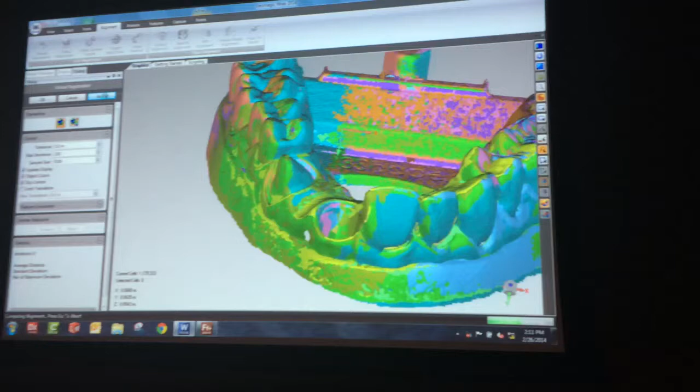What it does is see how it's moving. So now all 10 scan data is tight, perfectly fit with each other. Any questions so far?

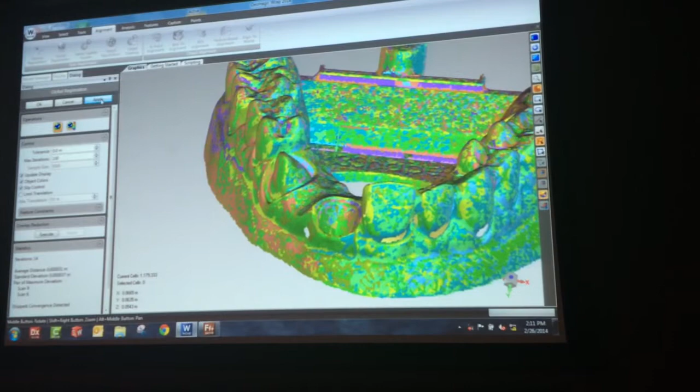Okay, so now scanning. Are you guys familiar with what scanning is? A little bit, technologies. So it always comes in points. Yeah, so this is still in points. What the next step is, convert into a mesh or STL. So I'm going to do that.

So far, pretty straightforward, the software. You don't see me putting numbers in, everything just click OK, click OK. So there's no numbers much involved with this.

So what it's doing is just connecting the dots. Basically the scan will have 1.1 million dots. That's basically what we just connect, all the dots, all the points together, and turn into a bunch of triangles.

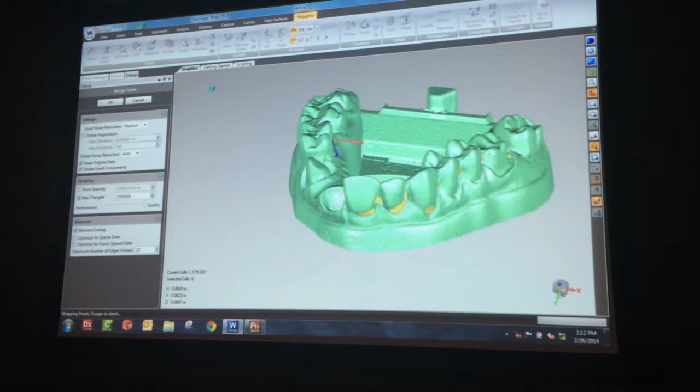So now I'll just kind of show you what it looks like. See, it consists of a bunch of triangles. It came along pretty good details too. If you guys can see that part, it's that 3D shape right there. So just a little simple editing and wrapping, it comes out.

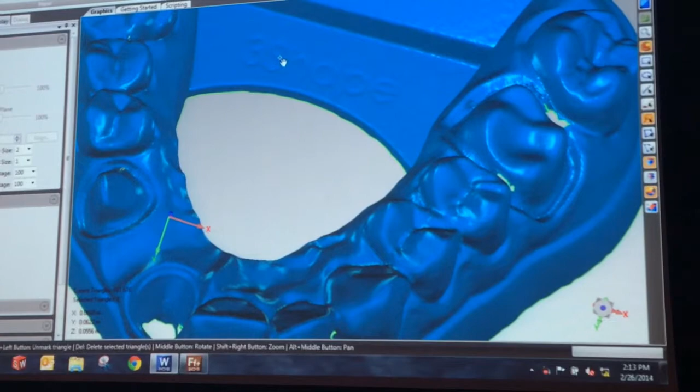Okay, so next step, couple of things. This is, when you scan something, it's in, technical-wise, in the middle of nowhere. Because the origin is in the middle of nowhere. Basically what we need to do is find out the center plane, so I can take the left side of the teeth and mirror it to the right side. So use it as some type of example instead of starting from scratch to draw teeth.

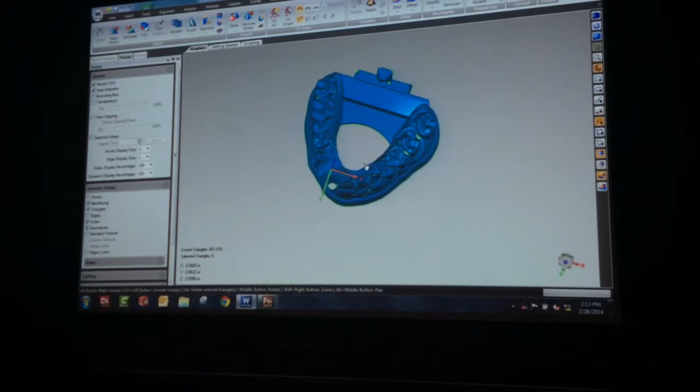Yeah, so first thing first, I want to get it aligned. Let me check on mesh. Just kind of clean it up. Take a seat, am I blocking you guys? Oh okay, just kind of clean up the scan data.

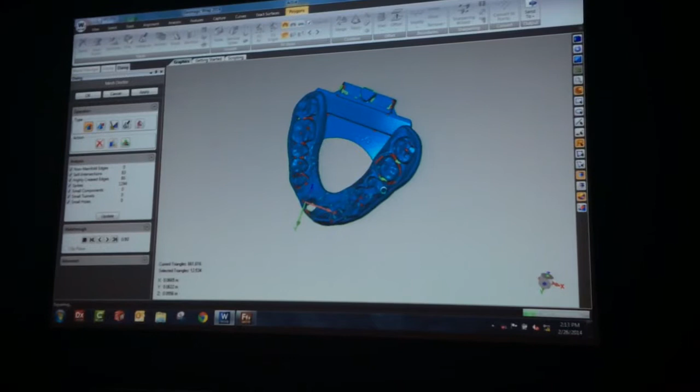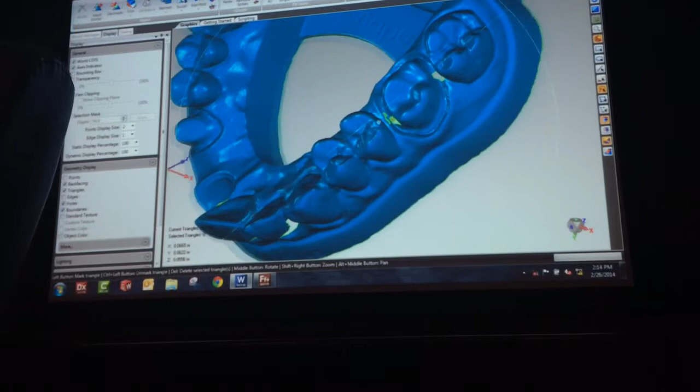So it's kind of what we call Mesh Doctor, just clean up the scan data. This should be all zero. Let me show you the hole fill process. So some of this area that we couldn't get to, we can simply fill all these holes. Just simply click on these. Instead of manually doing it, you can also do fill all.

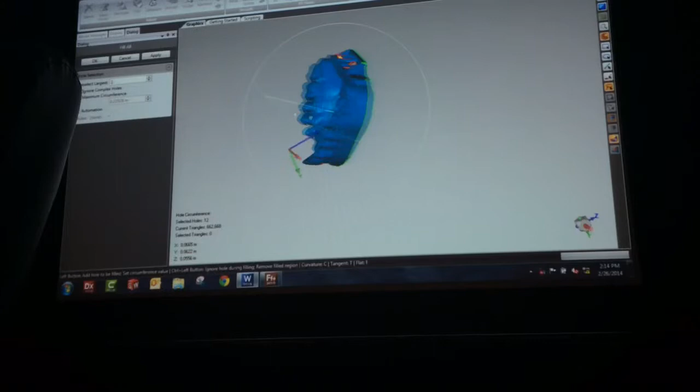So I can ignore a couple of big ones that I don't need to. And I simply hit apply, so these holes will be filled. And then I want to fill them at the bottom here too.

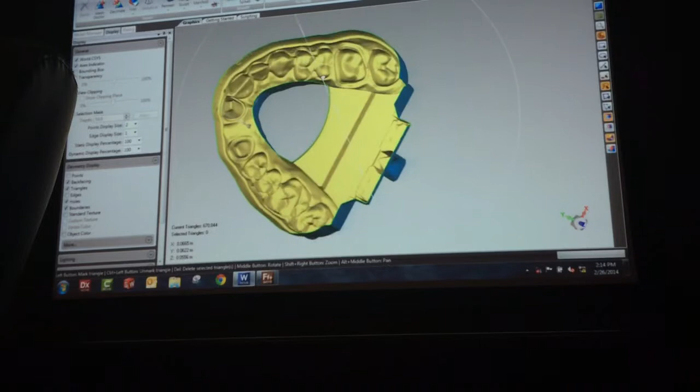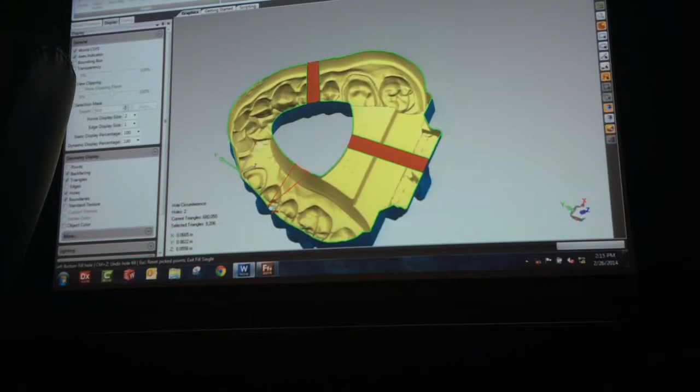So what I'm going to do is kind of connect them. I had an option to say what I want to fill, oh, if it's complex shape parts in curvature. If I know it's a floor, I can say flat. So what I'm doing here is just connect the bottom. Same thing here. And then I fill a complete hole.

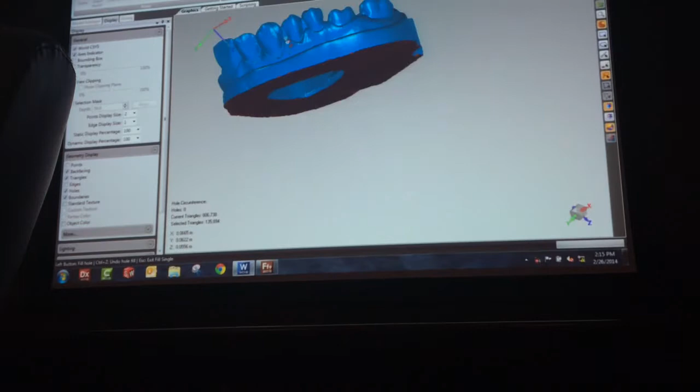So now I got a solid volume. So now this thing is completely solid. And if I need to, I can even compute the actual volume to see what the actual volume is.

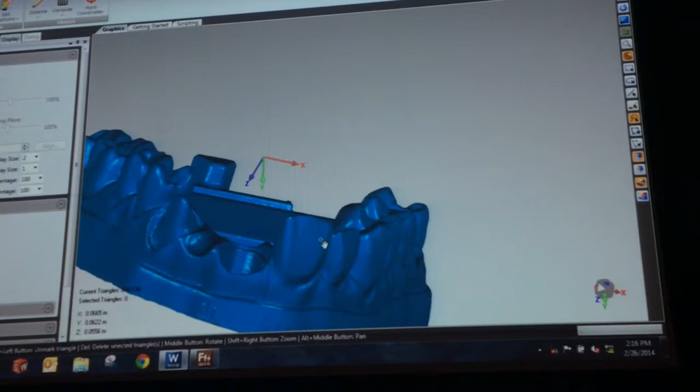So next thing, I want to get it aligned because you can see this is the world origin, XYZ is right here. What I need is actually to get it in the right coordinate system, 0, 0, 0, so I can find the right plane to do my mirror. So the next thing is to do alignment. I'm just going to save an example real quick.

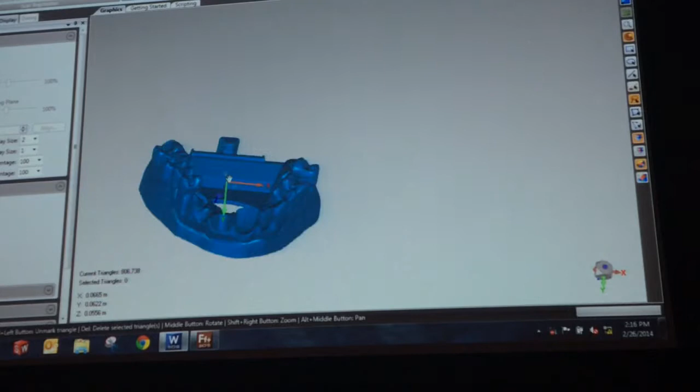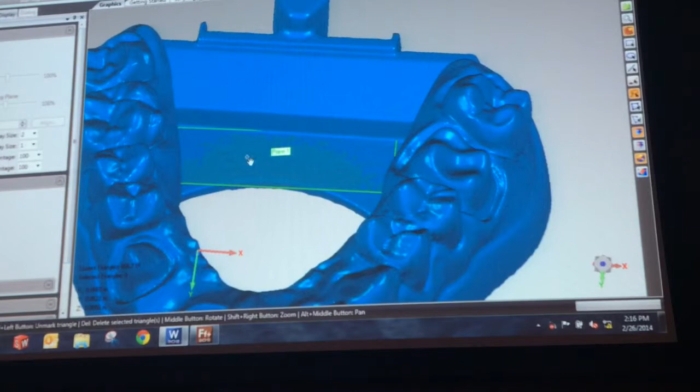Okay, so now I do alignment. First I want to kind of recognize certain areas, so select some area here. Basically I just need a reference as a plane. So I can randomly select any area, I say apply, so basically it fits a plane on it. Basically I'm using planes and geometry to help guide me to do my alignment.

And then funny thing, actually yesterday I tested this out and I tried to find a center plane and found out human teeth are not actually symmetrical. It's all out of shape. So let me show you the failed version.

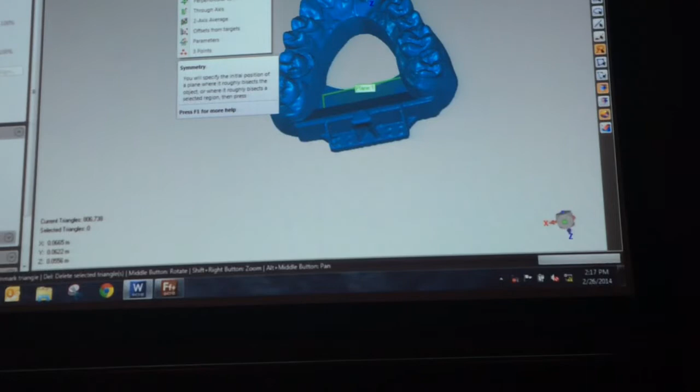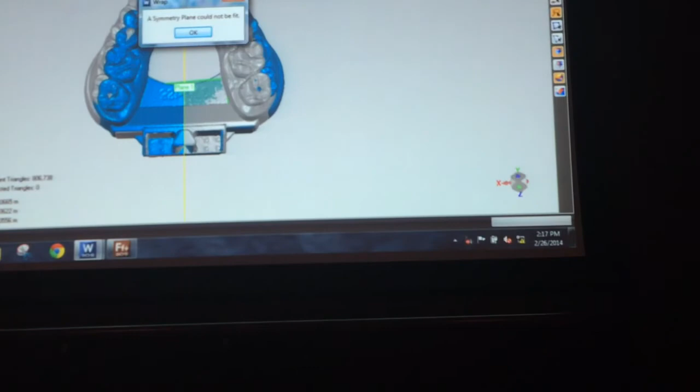So go to features, I can find it's called a symmetry plane. All I do need to just draw a line. So I say, okay, my center line is right here. So pay attention to the software, what it does. So basically what it does is actually use my guided line and try to flip left and right. And find out, you can tell there's a huge deviation between your left side and the right side. So it says it could not be fit. It's okay.